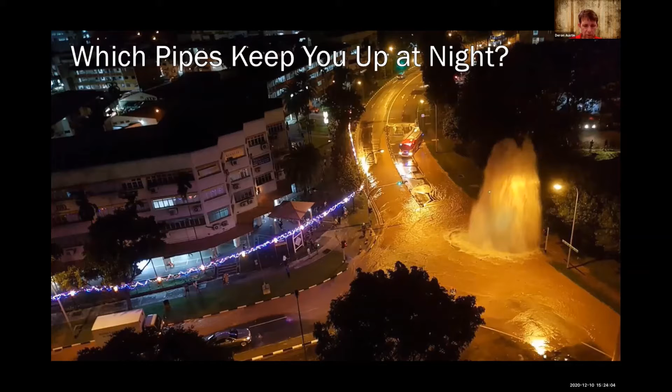According to the study, those particular categories of pipe have increased by more than 40% from 2012 to 2018. So as a result, it's no surprise that these two categories of pipe are the target for most replacement projects. As a matter of fact, 50-year-old plus cast iron pipe represents 20% of all the installed pipe in North America. The replacement costs range from $1 to $2 million per mile.

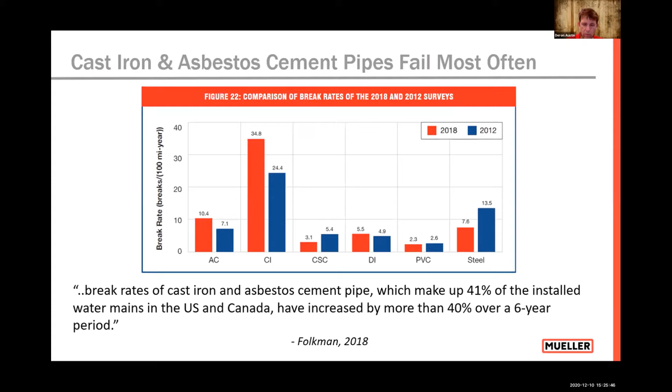However, there's some technology using acoustics, such as what we call our ePulse technology, that works very well at finding leaks and measuring the remaining wall thickness on these particular pipe types. At a cost of less than $30,000 a mile, it represents only about 1 to 2% of the total replacement cost. So it's a very economical way to assess the condition of your pipe from outside the pipe.

Water utilities are always seeking ways to be smarter, with the $15 billion or so that's spent annually in North America to improve water distribution pipeline systems. They want data to help decide which pipes to work on and what types of action to take, and they want to do that without inserting tools or interrupting the water supply. The last thing a water utility wants to do is replace good pipe.

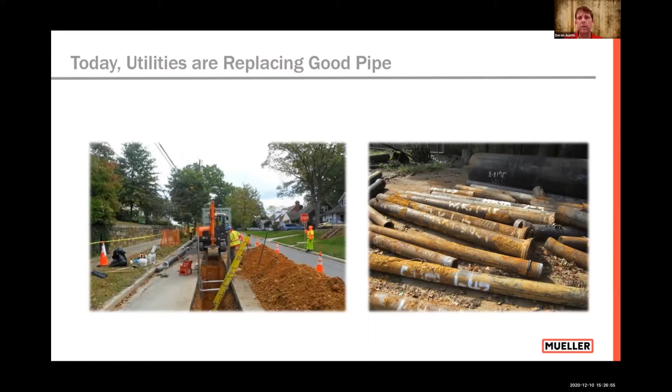There's a lot of time spent planning capital projects to replace pipe, a lot of time spent designing pipe replacement programs. So we want to use some of that money to determine the condition of the pipe before we start replacing these pipelines.

So I'm going to introduce you to a term called ePulse. It's an acoustic-based technology that helps utilities assess pipeline conditions without inserting any tools into the pipeline. It basically measures remaining wall thickness. The tool that we use is a correlator. You can see the receiver up there, transmitter 1 and transmitter 2.

The way this correlator works, which we call LeakFinderST, the sensors are generally smaller than a Coke can, and they attach to the outside of the water pipe, either to a hydrant or possibly through excavation directly to the water column if the sensors need to be placed closer than what the hydrants will allow.

So generally these sensors are placed about 300 to 500 feet apart, and technicians measure the amount of time it takes for sound to travel between the two sensors. Then that velocity, the wave propagation velocity, is fed into our proprietary algorithms, along with other site information like pipe diameter, material, lining condition, in order to determine the remaining wall thickness.

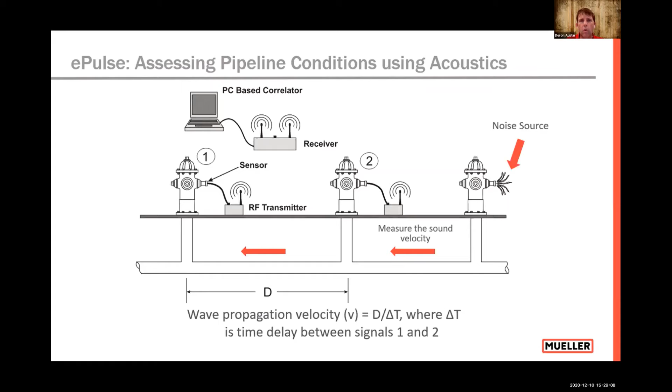So an ePulse pipeline condition survey also includes an acoustic leak detection for each segment of pipe. So what you end up having is a leak detection survey as well as a remaining wall thickness. So here's how the process works. A sound is induced either between or adjacent to the two sensors. That's picked up by the receiver, and the speed of sound is recorded in the laptop computer.

They flow a small amount of water, and this test flow creates noise. It's picked up by one sensor first and then the second sensor. And so from there, the velocity measurement can take place. Because the kit is battery operated, portable, and attaches to existing fittings outside the water pipe, it's easy to adapt the technology to different types of pipe networks.

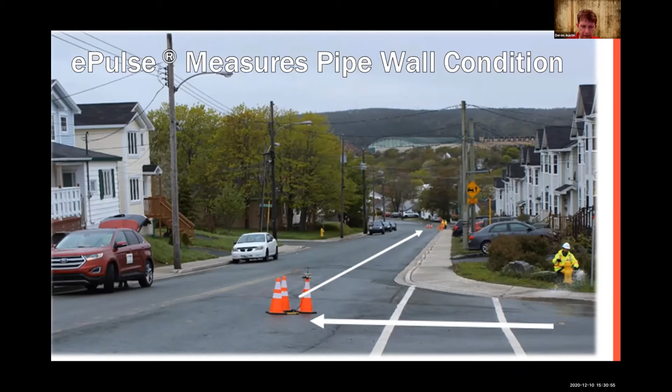In some cases, as I mentioned, we may need to excavate potholes to actually attach the sensors in between long distances of pipe. So this is a technique that's used probably on every 3rd project that we're involved with, is potholing.

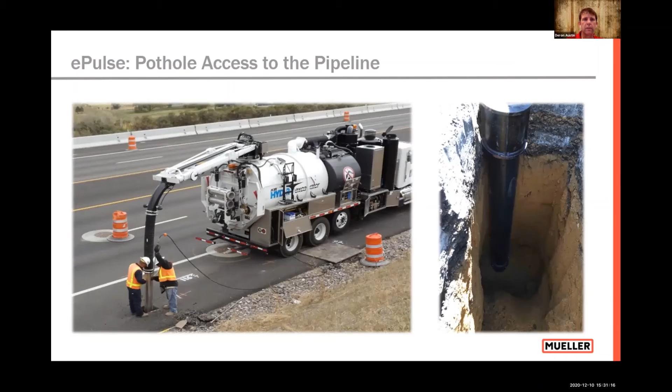So a lot of people will ask about pitting and corrosion, tuberculation, and graphitization. Because tuberculation and graphitization do not contribute to the structural thickness of the pipe, that's actually ignored in the calculation. Pitting and corrosion, on the other hand, will impact the speed in which the sound travels through the pipe. Therefore, it'll impact the ePulse measured pipe thickness.

And again, the key here is this is survey level technology. Results from an ePulse survey are not going to be able to pinpoint the thickness along the length. What's reported is really a minimum average wall thickness along a length of pipe. So it is a survey level, but it's a very economical survey level assessment from outside the pipe at about $30,000 a mile.

So this minimum average wall thickness over the length of pipe to be tested sometimes can be a little confusing. So if you found the thinnest remaining wall thickness around the circumference of the pipe and you average this value, that would actually be the ePulse measurement. And since most metal pipes that are pressurized degrade mostly at the bottom of the pipe, the ePulse average thickness would be conservative.

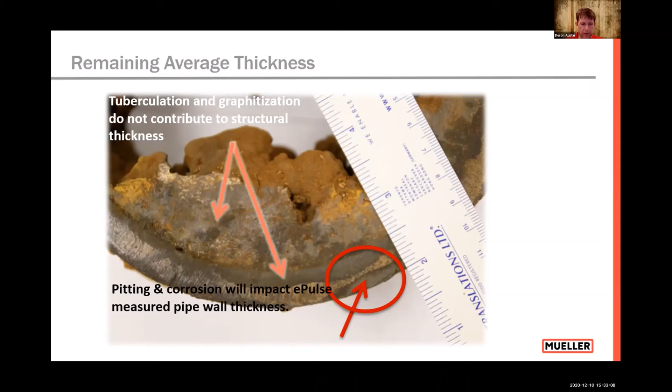As I mentioned, it doesn't measure any tuberculation or graphitization that remains in the pipeline. It's only measuring the remaining structurally intact wall thickness. And the algorithms that we use in the calculation of remaining wall thickness have been validated over the past 10 years by many utility partners that we've done business with. These utility partners include Suez Water, American Water, WSSC, to name a few.

So they've run hundreds of validations on the ePulse technology, comparing these independent thickness measurements with the acoustic ePulse thickness measurements. And our correlation is approximately 91%, which is very good agreement between the two data sets. And we continue to refine these algorithms as we get more and more coupons back from utilities who want to double check that our measurements are indeed accurate.

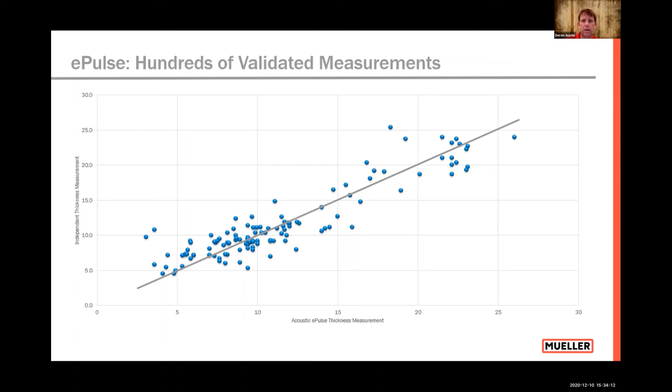One of the additional services that we offer along with the acoustic leak detection survey and average remaining wall thickness survey from ePulse is the remaining service life. So if you think about pipes like brake pads in your car, and we know how much brake pad there was when we started and how much there is now and how long it took to wear down, you can get a pretty good idea of how much longer you can keep driving your car before the brake pads need to be replaced. And it's a similar concept here with remaining service life using acoustics.

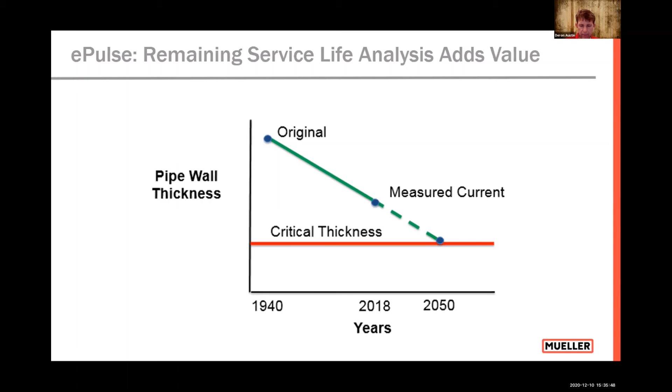In terms of different types of pipe material, we work with engineering partners for larger diameter cast iron, AC pipe, steel, PCCP, and other types of pipe traditionally used in larger diameter. So we have some engineering partners we work with for remaining service life. But all of these pipe types and diameters are well within the capability of the acoustic leak detection technology.

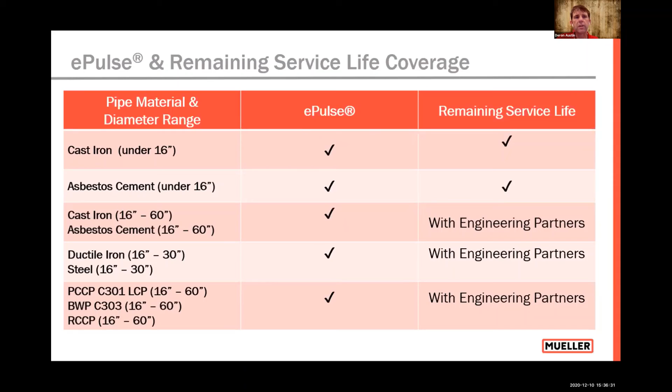I did mention that it's a survey level analysis. So by deploying a field crew, they can generally do about 2 miles of acoustic leak detection and average remaining wall thickness survey work in about 3 days without significant interruption or tremendous traffic control issues. And for that, of course, the clients will get in return a report several weeks later that allows them to look at, for each segment surveyed, the remaining wall thickness, and if there were any leaks found, where those leaks are, plus or minus 3 feet. So it is a survey level report.

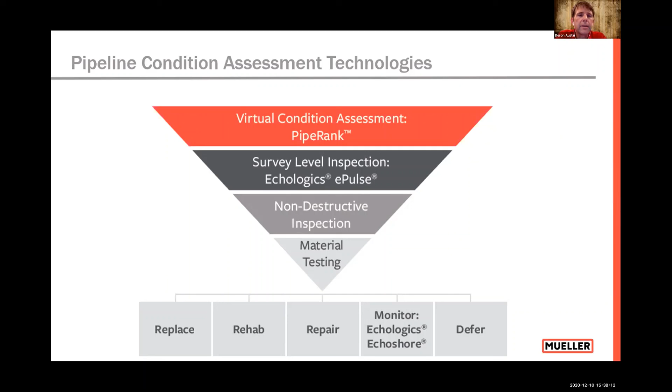It would sit, in terms of the inverted pyramid from M77, just below, say, a desktop model. One of those desktop models that is becoming more popular today is what's called a virtual condition assessment. So in the event that a utility wants to survey and prioritize their pipes, maybe across their entire network, that can be done with AI technology or a virtual condition assessment. We call that PipeRank. So instead of doing a survey level assessment in the field, this can be done with a desktop model.

And usually what we do is we gather information from 3 different categories of inputs, like utilities, which would include pipe material, age, break history; public data, which would include weather, soil, seismic activity, et cetera; and some other proprietary variables. And then an AI tool analyzes that information and develops a prioritization based upon that data. In a sense, it's basically an AI analysis.

And then usually the last year of break history is withheld and then compared to the predicted breaks from the previous year. That's the way that we can demonstrate the accuracy of PipeRank as a virtual pipeline condition assessment technology. So even though it's beyond acoustics, it's a more economical solution, even if $30,000 a mile doesn't fit into a utility's budget.